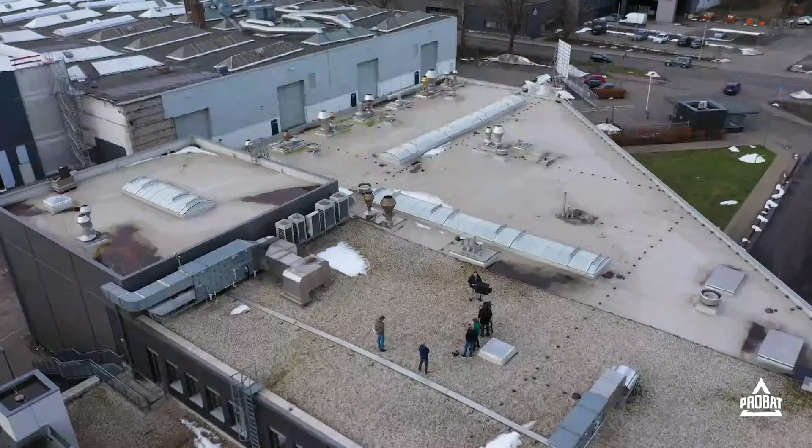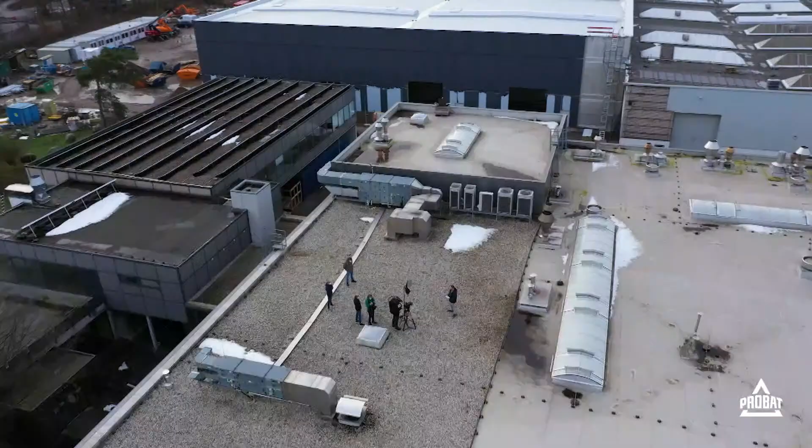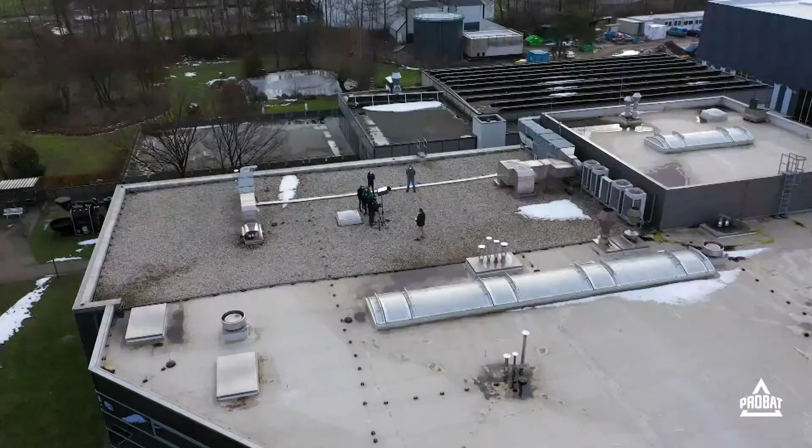In today's session, we would like to deal with one of the most important questions in the global coffee industry right now. How can roasting processes be made more sustainable and energy efficiency potentials be better exploited? In this regard, we would like to demonstrate our range of state-of-the-art environmental technologies, highlight possible applications and investigate possible answers to future demands in this regard.

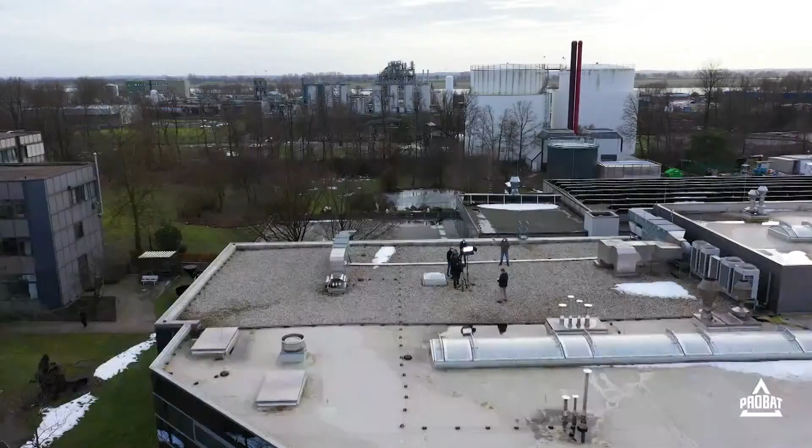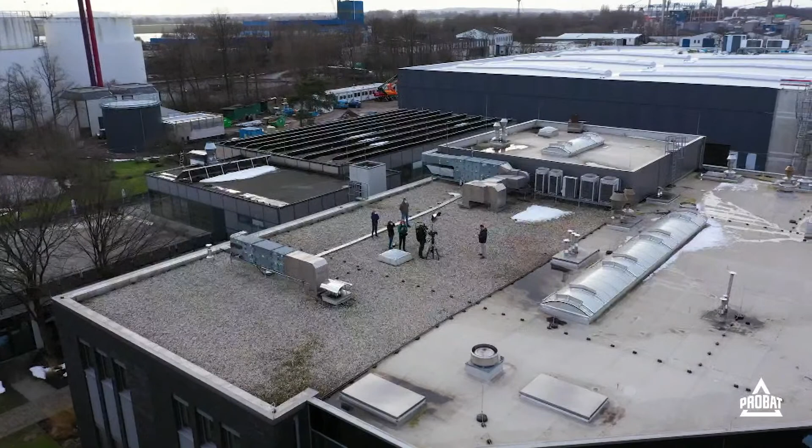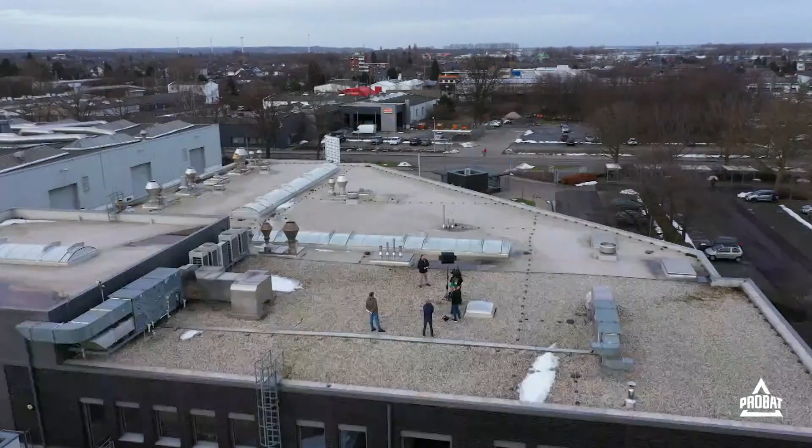In addition to warmer temperatures, climate change also affects global weather. Scientists have already predicted that there will be an increase in the intensity and frequency of extreme weather events like storms, floods and droughts. So we can see these terrible pictures in the TV news nearly every day.

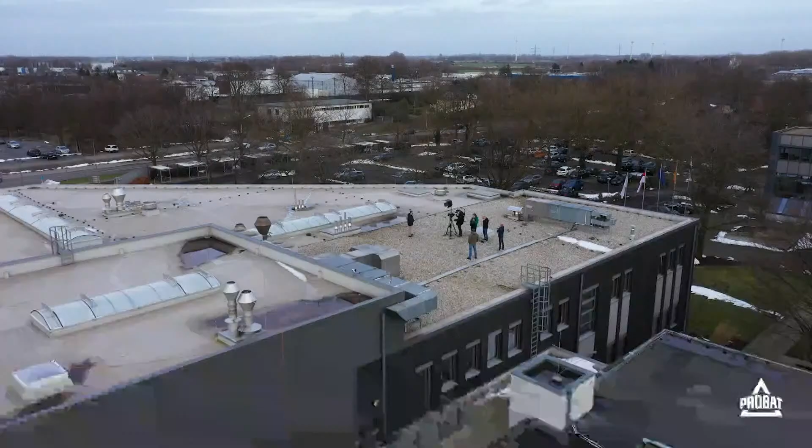Naturally, climate change also affects the product we are all working with, coffee. It is interesting to know that coffee requires special environmental conditions to survive and an even more specific set to bear fruit. Coffee's optimum annual average temperature is 18 to 21 degrees Celsius. It can withstand temperatures up to 30 degrees Celsius, but the plants are stressed in such conditions and the quality of taste may suffer. A recent study of the impact of global climate change on coffee predicts that areas suitable for coffee could be reduced by 50% from current levels by 2050.

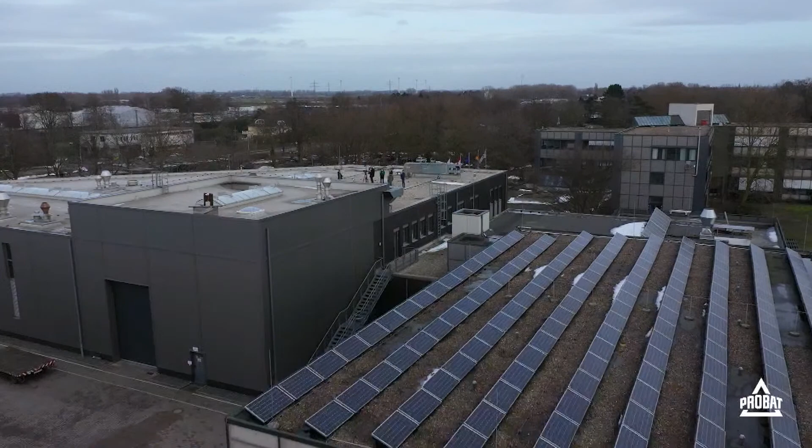But if we are talking honestly about this topic, it is also important to emphasize that coffee is not only threatened by climate change, it also contributes to it, for example, due to the carbon dioxide emissions during the roasting process. We as PROBAT are very aware of our responsibility to the environment. And so it is of great concern to us that we can provide you, the coffee industry, with the best possible solution in this field, so that we can ensure together that our children and grandchildren can also enjoy living on our beautiful green planet in the future.

We know that we are not the only ones who think that way. So we asked our partners and friends from the coffee business what their standpoints are in regard to sustainability, why this topic is so important for them, and what their expectations are regarding exhaust air treatment for roasters. Okay, see you after the clip.

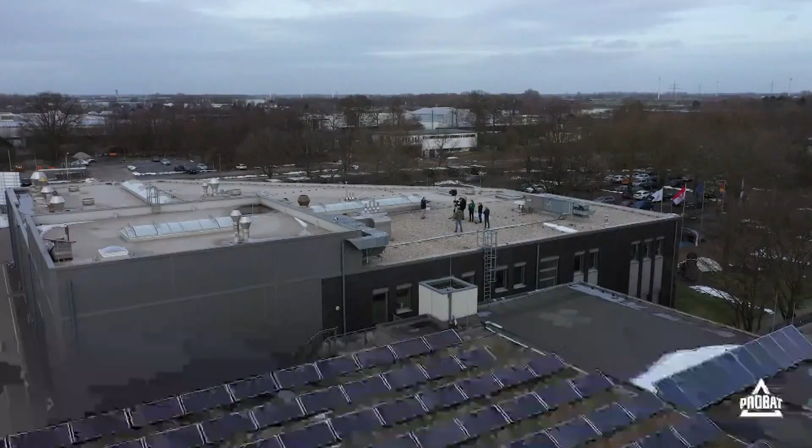Hi guys, and greetings to PROBAT from The Barn here in Berlin. We are a specialty coffee roaster and we are huge fans of PROBAT. So thank you for having us on this call. Talking about sustainability.

Sustainability is a key value of our company and everything that we do. And it's also part of the brand loyalty that our customers have when they're buying a bag of coffee and enjoying our coffee or coming to our cafes here in Berlin.

There are so many angles that we can discuss where sustainability can be further improved for us. But the key for us is at the source. And when we look at sustainability at origin, we look at economic sustainability and environmental sustainability. All of that for us is the kind of S label that doesn't exist, sustainability label.

At the roastery, of course, we are working with afterburners, and we are still growing from a very small size, and there will be other elements that we need to look at when our roastery is expanding. At the moment, we have 2 machines, so the cooling air and things like that, of course, are on the agenda.

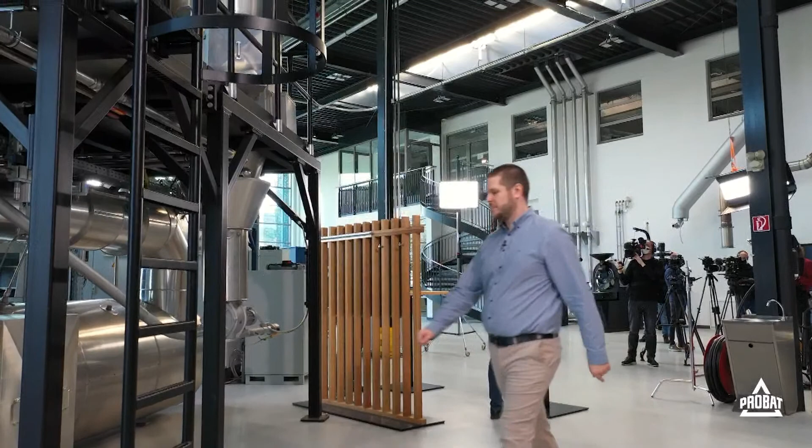But coming back to our topics, we have a wide range of solutions in our portfolio. So for time reasons, we can only touch on some of them in the next minutes.

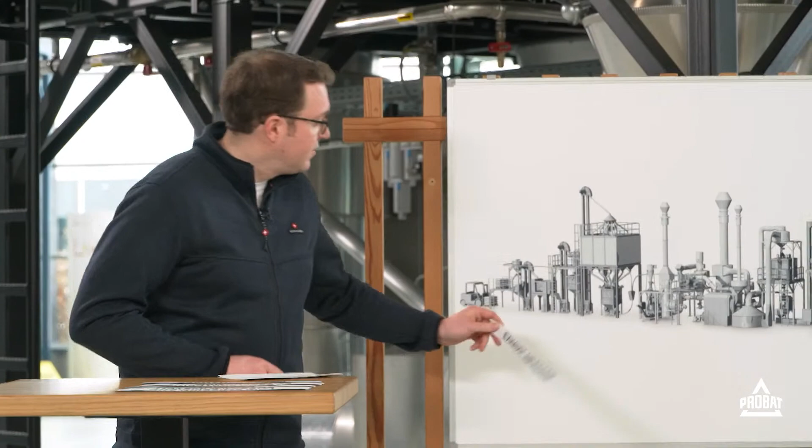So the first solution, what about exhaust air filter? Exhaust air filters are an easy system for reduction of odor or smell when there is a low airflow volume. A box with a mineral called zeolite could capture smell and odor from the airstream. So no additional energy is necessary for this kind of air cleaning. This solution could be used for shop or lab roasters in your factory.

What about high-efficiency cyclones? Yes, the high-efficiency cyclones we design in a new way. We use our fluid simulation system to get the best performance out of that. So we have high-efficiency chaff separation and dust reduction with low energy cost. The advantage is also that we have a lower installation height, and so we have also lower energy and pressure loss.

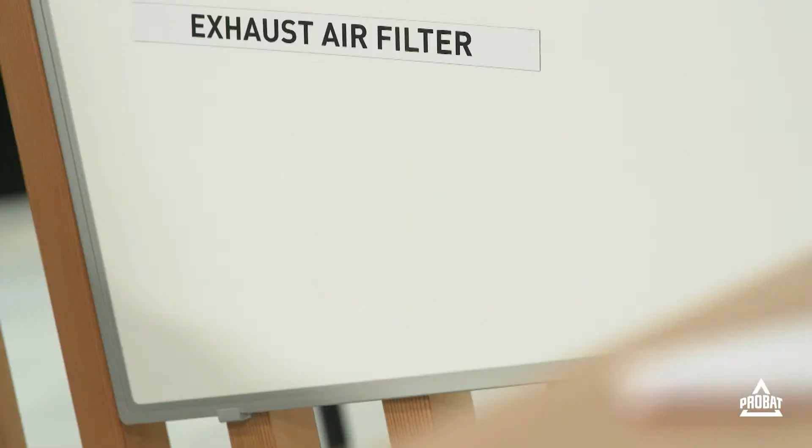Thomas, what about heat exchangers? Heat exchangers are efficient systems to reuse the energy of the process in a coffee factory, like it happens during the roasting process. Heat exchangers could be used in different kinds of combinations, with hot air streams to heat water, air, or thermal oil. This energy could be used then for other kinds of processes in your factory, or for example, if you would like to preheat the fresh burner air. So you could lower your general energy use.

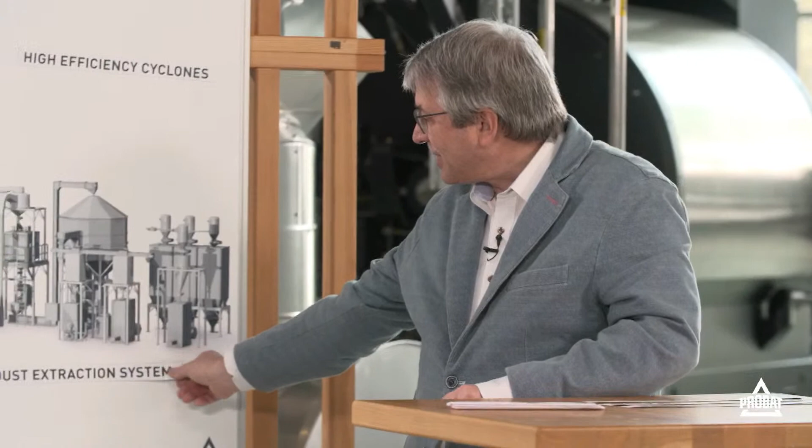What about dust extraction systems? Yes, with the dust extraction system, we can remove dust and also foreign particles out of the green coffee, and that's a very effective way. We can comply with legal limits that must be reached, and we can also use the warm exhaust air that is fed back to the room, so we don't need fresh air from the outside that we must heat up. So we save energy and we also save CO2.

What about carbon footprint? There are a lot of possibilities for CO2 reduction or to lower your carbon footprint. To give an overview of those possibilities, we developed a special micro website where you could play with different kinds of solutions and possibilities, so that you could directly recognize these effects. It includes efficient systems, sustainable materials, fuel types, or green energy. All that you could find on our website, or just Google for CO2 and PROBAT.

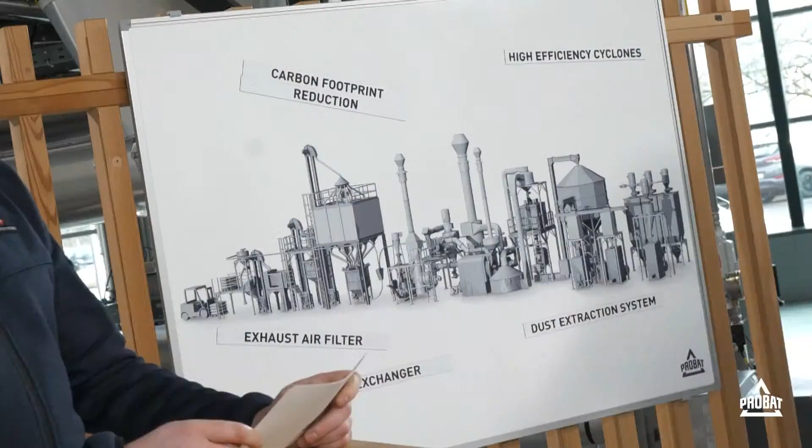Let's talk a little bit about catalytic afterburners. Yes, the catalytic afterburner is more or less a standard system that we use in the roastery to minimize the emissions and also the odor that comes out of the exhaust air. That's compliance with legal limits while minimizing the energy used. So we have different solutions, also with lower temperature, to get an effective exhaust air treatment. We have also a modular system to get the flexibility to reach the legal limit of each country that we are building in. So it's also possible to have this catalyzer for industrial and also for shop roasters.

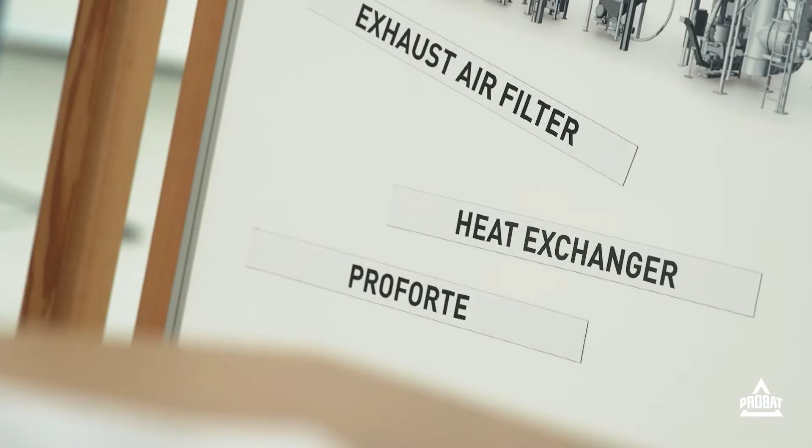What is a Proforte system? The Proforte is a flameless regenerative thermal oxidation system. Here we have one solution for two subjects: low emission levels, especially on the NOx side, and low energy consumption to save energy costs. This could be done by not using an additional burner, so we save the emissions from the burning process. For lowering the emissions, we use the energy from the chemical process of cracking the emissions.

The thermal energy which arises during that process will be directly recovered into the ceramic bed of the Proforte system. You could recognize this by a look at the inlet and outlet temperatures. There's only a delta T of 50 degrees C between inlet and outlet. So in both respects we have a very efficient system.

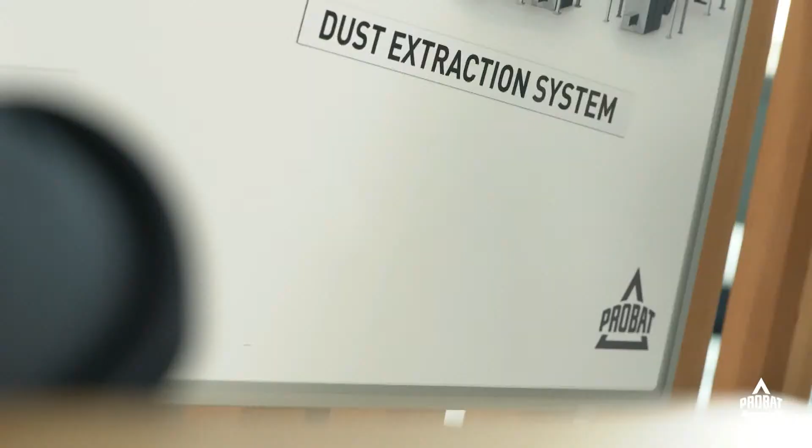Let's have a look into green coffee preheating. Yes, this system is an efficient way to use the clean air that comes out of the catalyzer for heating up the green coffee before it comes into the roaster. We have more efficiency and we can reach more than the output of the roaster.

Up to 20% energy we can save with it. It's possible to integrate the system in all roasting systems that we have. And it's also possible to use the system in an existing roaster; you can upgrade it with the green coffee preheater.

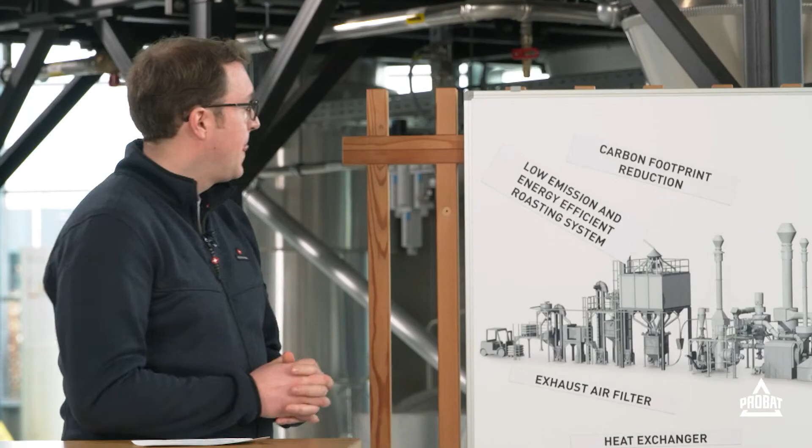What about low emission and energy efficient systems? Here the inspiring idea is to combine different solutions from emission cleaning and energy reduction to reach a carbon neutral factory. This could be done by using the green coffee preheater in combination with the Proforte unit, special heat exchangers, and energy storage systems.

With that kind of combination, the outgoing airstream from the roasting process only has an outlet temperature of 50 degrees C. So most of the outgoing energy from the roasting process is reused. When green energy and biofuels are used in addition, a carbon neutral roasting process is reached.

What about the topic ProAir? Yeah, the ProAir system is our new development. With it, we can reduce the odor of our cooling air. So, David, what's new about the system and why did we develop it? Yeah, Thomas, you are right.

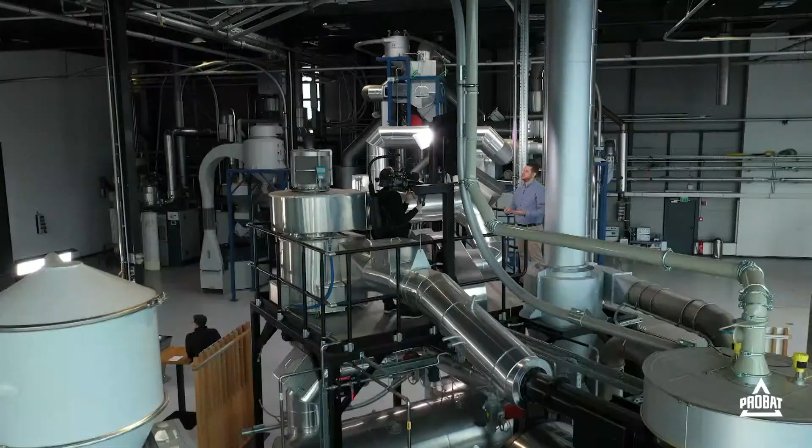We have been asked more and more frequently by our customers for solutions to remove smells and odors from the cooling exhaust air which is released during the cooling process into the open. Naturally, this topic is very important for roasteries located near residential areas because, as you can easily imagine, the neighborhood doesn't like to have these smells and odors around them.

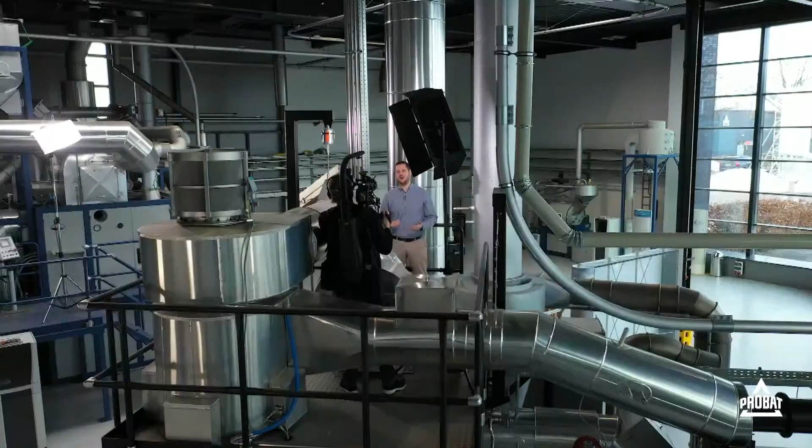So we as PROBAT, as your go-to partner in the coffee sector, take our role very seriously. So we set up a task force to find a solution. In this task force, many colleagues from different fields and departments came together and worked hand in hand to find a solution. So now we are very happy to present you a technology which is unique in the coffee sector. And if you ask me, this will be a game changer.

So I would like to hand over to Thomas. He will give you some special insight into this new technology. Thomas, the stage is yours. Thanks, David, for the introduction.

In this session, we heard that we have a lot of environmental solutions in our portfolio. But especially for the cooling air, we set ourselves the target to develop odor reduction in the easiest and most effective way. There are always problems for our customers operating a roastery. Sometimes it's a neighborhood saying you have stinky air, or sometimes you must reach legal limits. We have understood these problems and asked ourselves what we can do to make the sky blue.

With the ProAir technology, we developed with our partner Aerox an efficient and simple way to reduce the odor of the cooling air. We can install the system in a new but also in an existing plant. And the best thing is that it has no influence on the cooling or the roasting process.

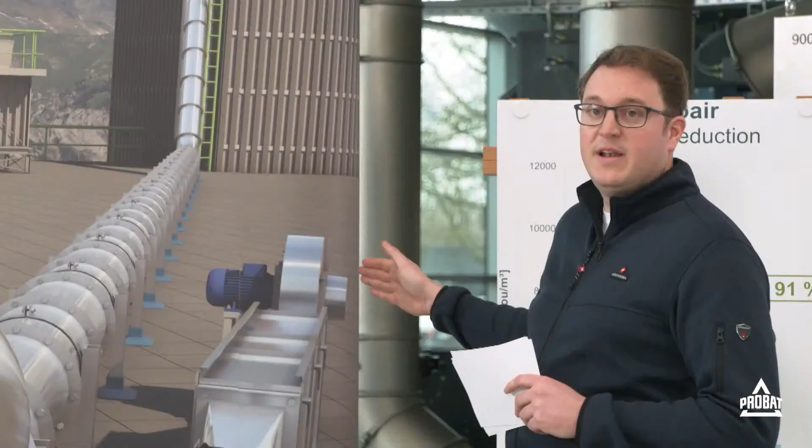When installing in an existing roastery, you must check whether it's better to integrate it before or after the cooling cyclone. So what are the parts of the system? We have the fresh air inlet, a ventilator, a filter cabinet with a 3-stage filter: one pre, one HEPA, and one carbon filter. An electrical heater to always get the same conditions.

Then the injector and the adapter. And of course, we also have an electrical cabinet with a PLC. And that's all. So you see, very compact and very easy. It's also possible to integrate the system in a horizontal and also in a vertical pipe. So let's have a look inside the heart of this ProAir system.

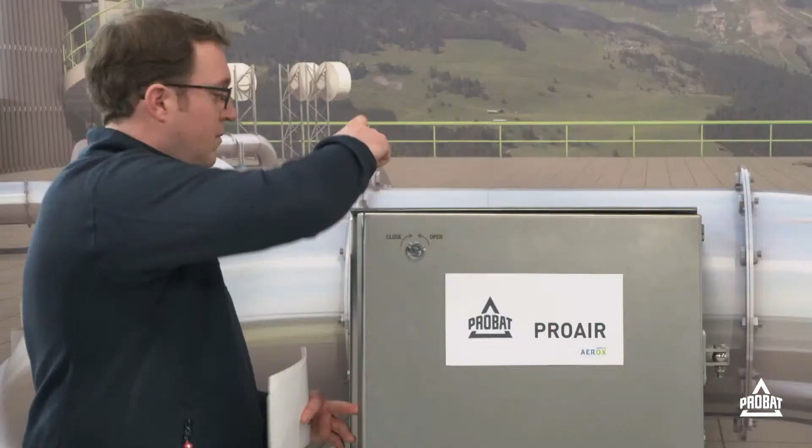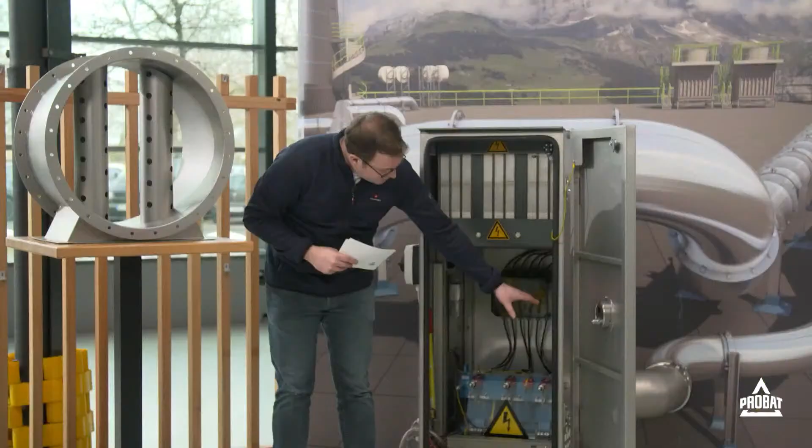So here we have the electrical power unit, where we create the high voltage. And in the top, we have the modules, where we create the plasma. So the air coming in is going this way through the modules. And then we inject the plasma into the cooling pipe with these nozzles.

So how the process works. The ventilator of the ProAir system is always on. And only when you have your batch process, so when the cooling process starts, then the power unit starts and we directly have odor reduction and plasma building. When the cooling air goes off, then we shut down the power unit and we have no more plasma building.

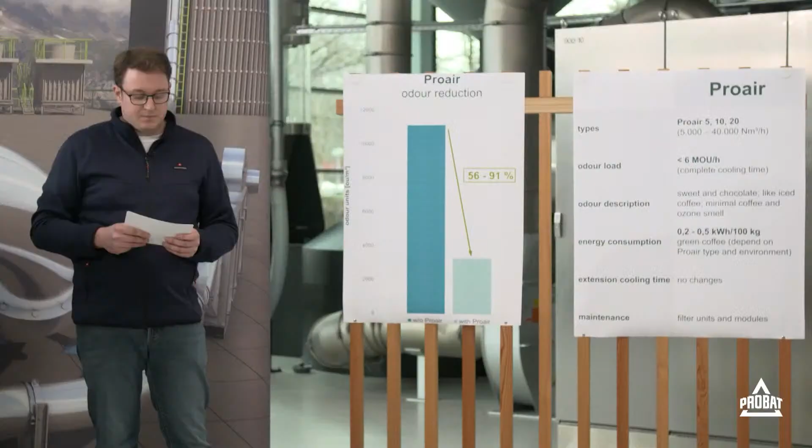So what are the results with the system? We have had a test unit in the field for more than 6 months now to get experience with it. The results are very stable and reproducible. Depending on the product or the coffee and the green or raw gas load, we get a reduction of odor units from 56 to 91%. And we have no more strong coffee smell in the air. So very effective.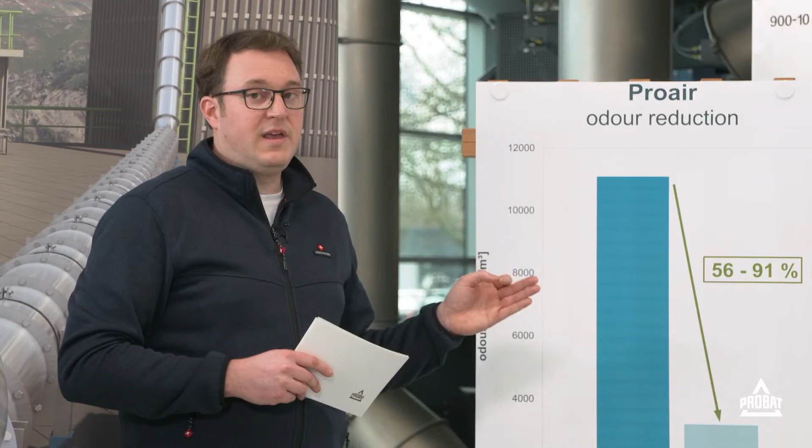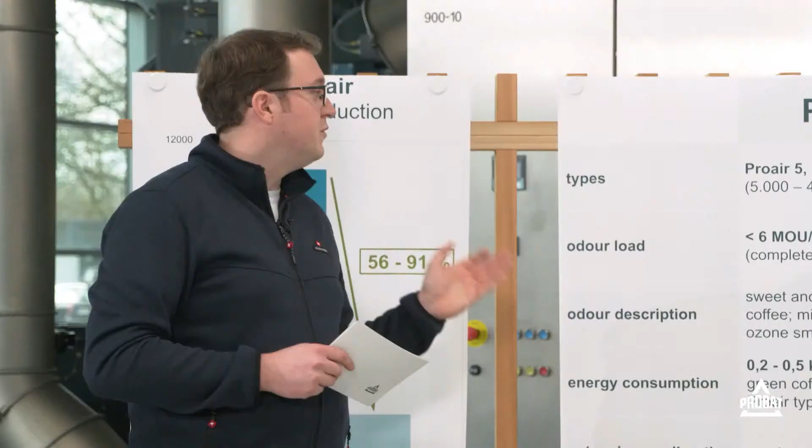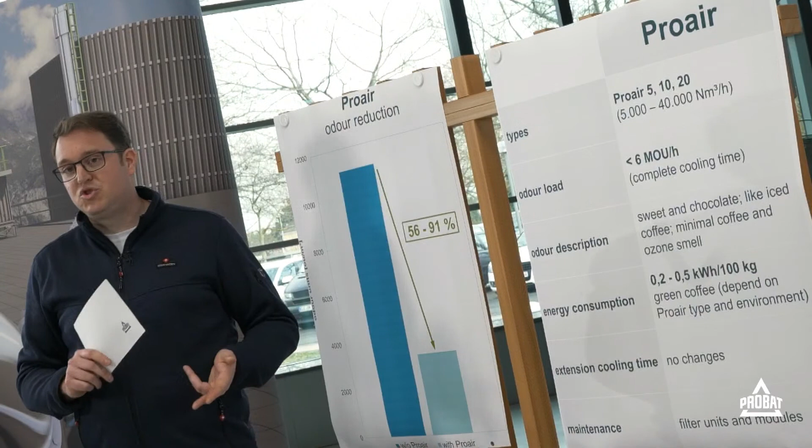What are the benefits for you? We have 3 types, ProAir 5, ProAir 10 and ProAir 20, for a range of 5,000 to 40,000 norm cubic meters per hour. The odor load that we have reached is lower than 6 mega odor units per hour, and that over the complete cooling time. The odor description after the cooling chimney is like sweet, chocolate, or like iced coffee, but no more strong coffee smell.

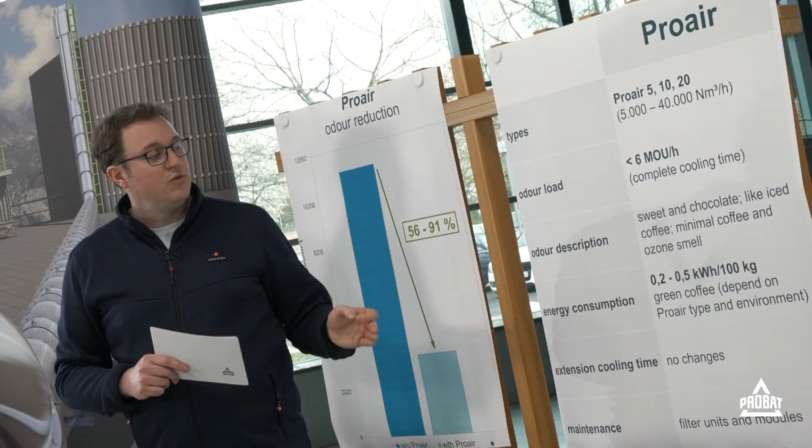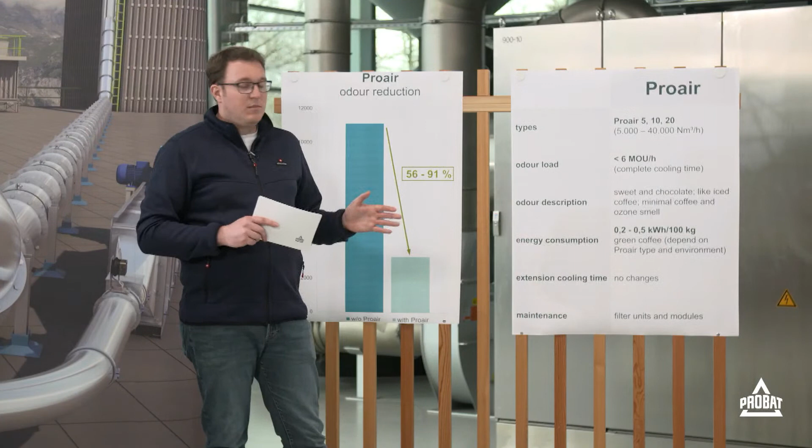The energy consumption is also very low. We have only 0.2 to 0.5 kilowatt hours per 100 kilograms green coffee, depending on the ProAir type and the environment of the system. We have no influence on the cooling process, so we have no extension of the cooling time. And what about maintenance? We have limited operating hours for the filter and for the modules, which must be changed over time.

So keep in mind, the system is easy, is retrofittable, and you have high efficiency, low energy consumption, and no influence on the roasting and the cooling process. So you save your production and you have no production stops. So that's all from my side.

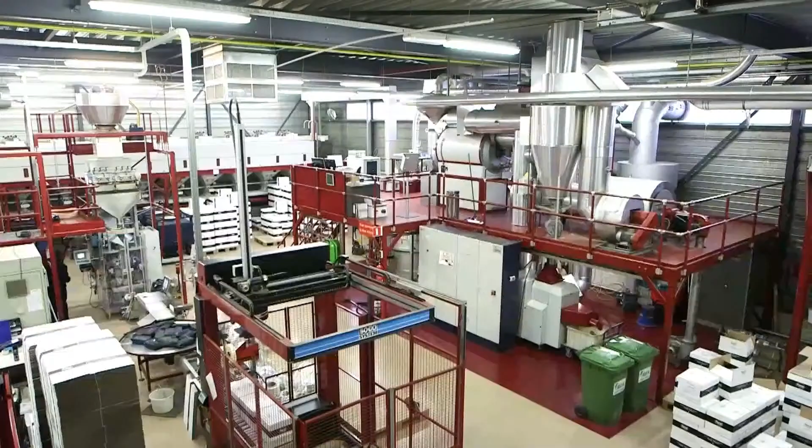Environmental technology plays a very important role at Peeze, particularly in our coffee roasting process, because since 1994 we have had a very innovative coffee roaster. We developed together with PROBAT and von Gimborn a recirculation roaster with a catalysator, a controx cooler, and a cyclone for coffee husk. So we reduced a lot of energy, greenhouse gases, and water. And you can say it is the predecessor of the PX120 from PROBAT.

Well, I have great expectations of the exhaust air treatment technology from PROBAT because it is a good system to clean the air from the chimney. At the moment all the roasters are working on natural gas, some others on wood. So that we don't emit greenhouse gases, we have to develop a new roasting technology on renewable energy, I think. That's the future. I know PROBAT has some great ideas about it. So I say, let's work together and start with that new technology for the future.

So, thanks to Timo from Peeze for your view into the topic of this session. As you could see, we are always in close partnership with our customers to discuss ideas and visions linked to sustainability and the environment. So our goal is to consult you and always support you with the best solution from your point of view.

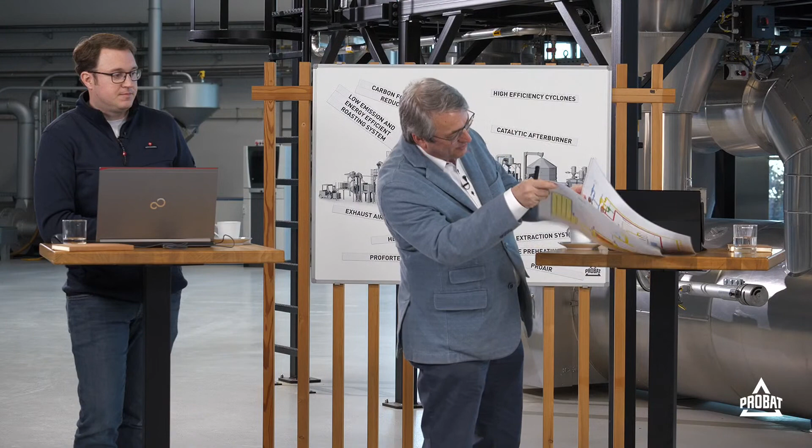Yeah. Okay, there's popping up also by email: how exactly does the Proforte work? Yeah, that's not easy to explain by wording, so I hope it will work with the fabulous film team we have here supporting us during the days. So what means the Proforte system?

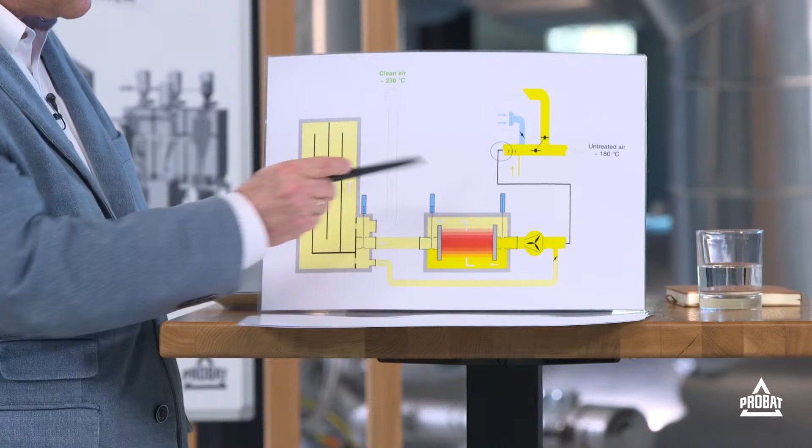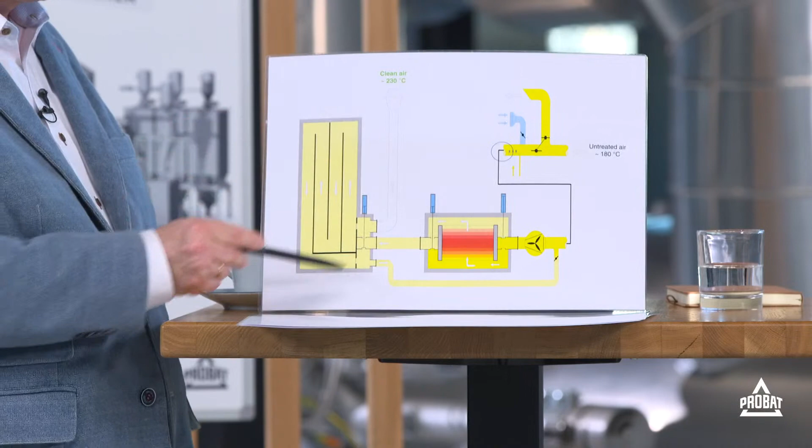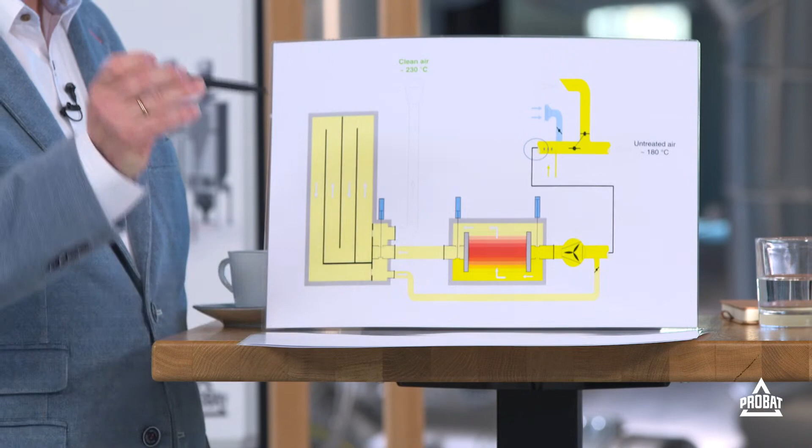Also, that system could be linked to an additional buffer tank. So when the poppet valves change their direction, the uncleaned air will be stored and will be going back, so that really 100% of the off-going air of the roasting process will be cleaned. I hope that was visible and it works thanks to the film team in that way.

Yes, and thanks, Thomas, for your nice explanation. Very detailed, thank you very much.

So we have another question. What is the service life of the catalyzer cassettes? So in general, we as PROBAT will give you a warranty on the lifetime of the catalyzer cassettes of 3 years or 12,000 operating hours. But we have also customers which use their catalyzer cassettes for, let's say, 10 years.

So if we are talking about this topic, it is important to know that the lifetime of these catalyzer cassettes depends on the roasting product. So the color, the moisture, and also the coffee sorts that you are going to roast. And if you send us some more detailed information about your roasting product, we are able to give you a more specific estimation about possible lifetimes of these catalyzer cassettes. Yeah. Thomas? Yeah.

There's some detailed question. Is it possible that the cooling air gets into the injector cabinet? No, that's not possible, because the air stream from the injector fan is always on. And the nozzles or the holes of the injector are so designed that the airflow coming from the cooling air is not going into these holes. But when there's a problem, we don't want the cooling air to get into the cabinet.